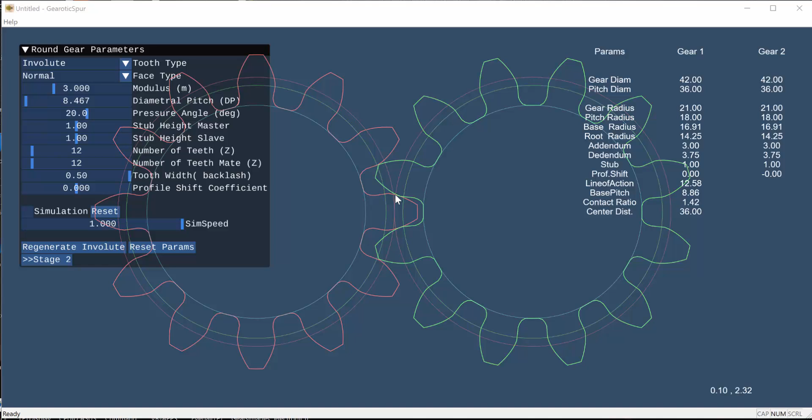Hello everyone, this is a video on how to use Gearotic Spur, which will appear on your desktop if you install the latest version of Gearotic. This was written because I got sick of trying to design shaft clamps and bearing flanges into gears that I make in CAD programs. When I print a gear, I'd like it to have a way to attach it to the shaft, and this is an easier way to do that.

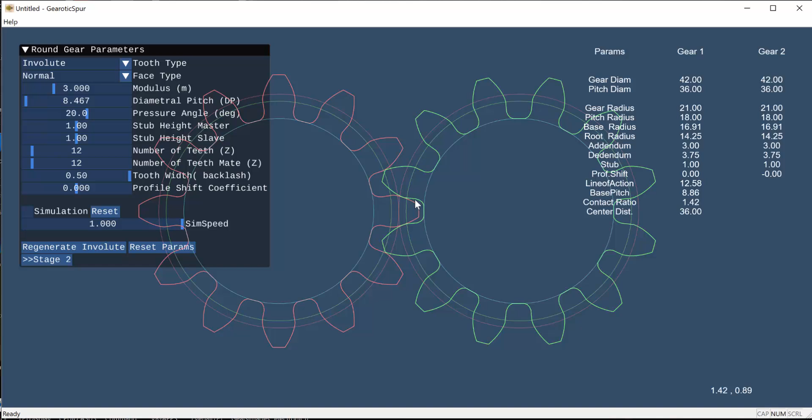This will be a quick video. If you're familiar with Gearotic, you're already familiar with almost every setting on the screen, but the way these things are displayed is a little different in this program, and there are 3 stages to designing a gear. When you start the program up, what you see on screen is stage 1, where we can simulate the gears to see how our mesh is.

The only setting I think I need to point out here is backlash settings. In some programs, you adjust the shaft distance to adjust your backlash. I don't like to do that because it creates too many complexities in designing a machine. So I like to put my backlash into the tooth width, and you will see a slider here for tooth width. I find on my 3D printer that even if I leave it at 0.5 for tooth width, they mesh very nicely on the set shaft distance. However, for many people, 3D printers will print gears a little bigger or smaller. In this case, I'd suggest you move tooth width down to about 0.48 or so, and you'll see that this leaves a gap between the gears.

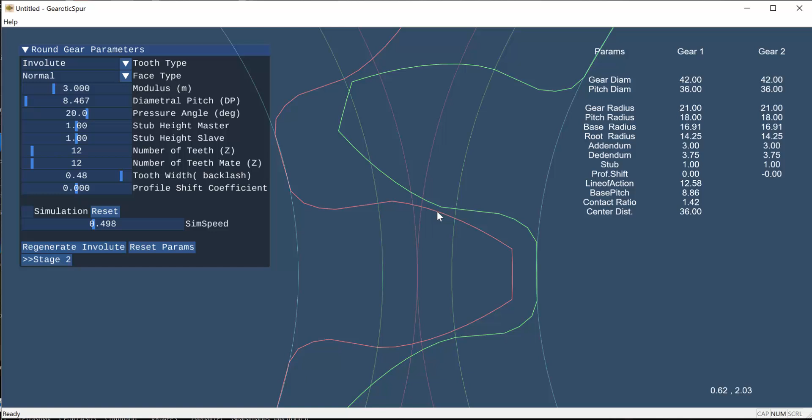Don't be fooled by what looks like a large gap in your gears. If you zoom in on one of these gears, you'll see down at the bottom right-hand corner I've got measurements in millimeters. If we look at the distance from the edge of this involute tooth to this involute tooth, you can see it's only about 1/10 or 2/10 of a millimeter. So it's not a big gap, but it does allow for a good backlash adjustment.

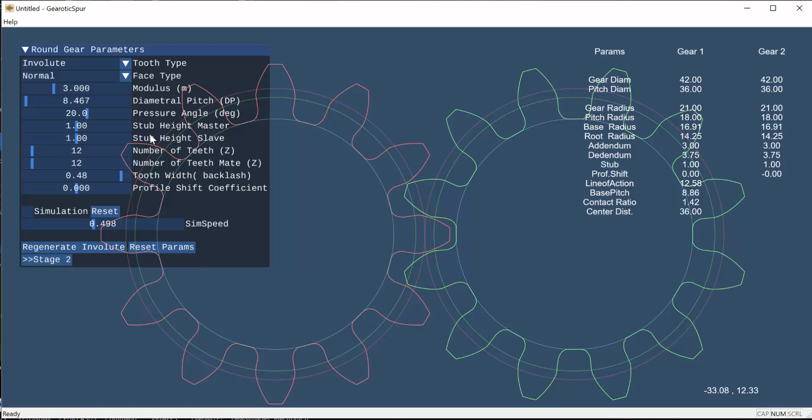Everything else here is typical to Gearotic, from the pitch and modulus to the pressure angle and so on. The only thing I should point out is that you can select normal or helical teeth, as well as involute or cycloidal tooth type. Once you do that, you'll see on the right-hand side of your screen all the statistics for the gear diameters and so on, and the center distance at the very end, in this case 36 millimeters.

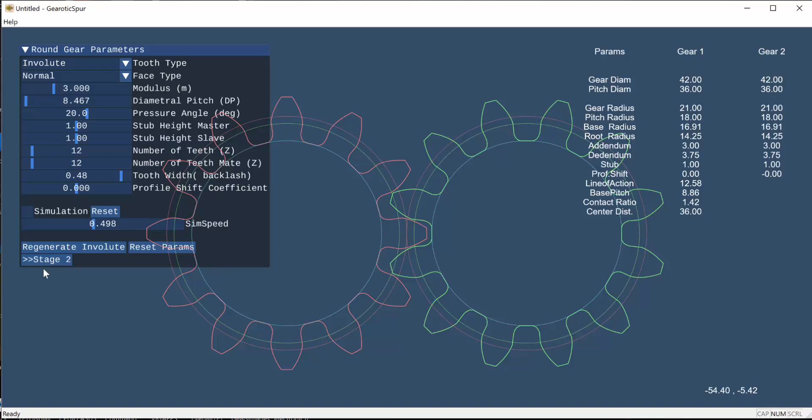When you're finished designing your gear outline, that's when we go to stage 2. Hit the stage 2 button, and you'll see it takes a second. I've got a fairly fast machine, and it takes 3 or 4 seconds to generate these outlines of spur gears.

These spur gears are generated using signed distance functions, so they're quite different from the spur gears that Gearotic actually generates. Their STLs are a much tighter manifold - it's just a better meshing system for these gears. That's not super important; even the old gears will print quite well, but for some of you, in some instances, it's better to have a nice closed manifold.

These gears can also be made quite small. If you're using a resin printer, for example, you could print a gear which is 1 or 2 millimeters across - not a problem most of us will ever have. So enough said on that.

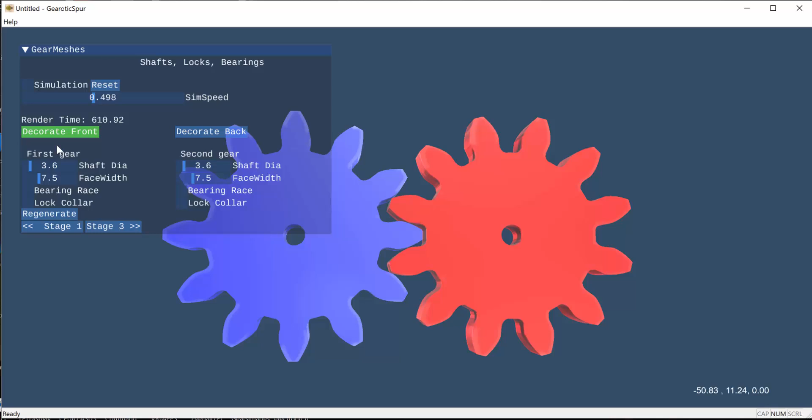On this screen, stage 2, is where we decorate our gears. When I say decoration, I mean things like bearing races and lock collars. Let's take a look, for example, at a bearing race. We have 2 gears here, a blue and a red. The blue gear is always the first part of your menu system, the red gear is always the second part. This is important to note because right now I'm on decorate front and the blue gear is on the left. If I hit decorate back, you can see the gears swap position - the first part of the menu is still for the blue gear.

That's worth taking note of. So let's turn on a bearing race as the most simple example. You can see I can set an outside diameter and a race depth. And if I hit regenerate, you can see this blue gear now has a bearing race in it.

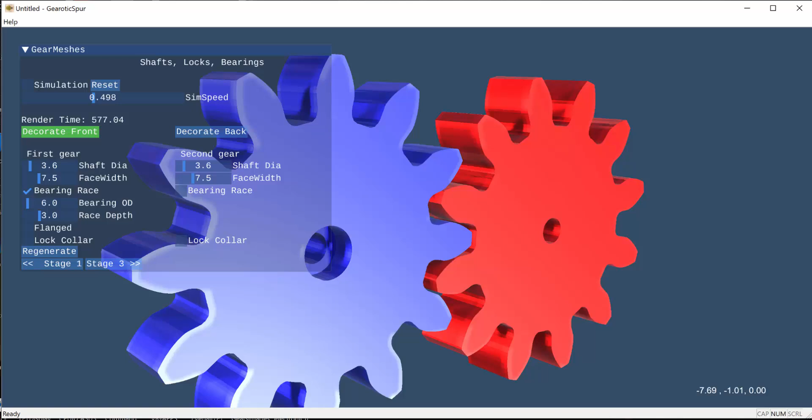You sometimes will see aberrations in there, like a shadow inside that bearing race. Don't worry about this. In order to keep regeneration times down, we're in fairly low resolution until the final stage of gear generation. So here we've pressed in a hole for a bearing of 6 millimeter OD, 3 millimeters deep. Pretty simple to figure that one out.

We can add a flange to that in case you have a flanged bearing. I sometimes like to put flanged bearings onto my system just because I have a lot of them laying around. And if we regenerate, we can see that gear now has a flange.

One thing about the menu system, you'll notice I can roll it around, but if I point my mouse inside this menu, nothing will happen. The menu overrides the screen's ability to rotate, so keep in mind that by hitting this arrow up on the top, you can shrink that away and inspect either one of the gears. So again, there's our bearing race and flange.

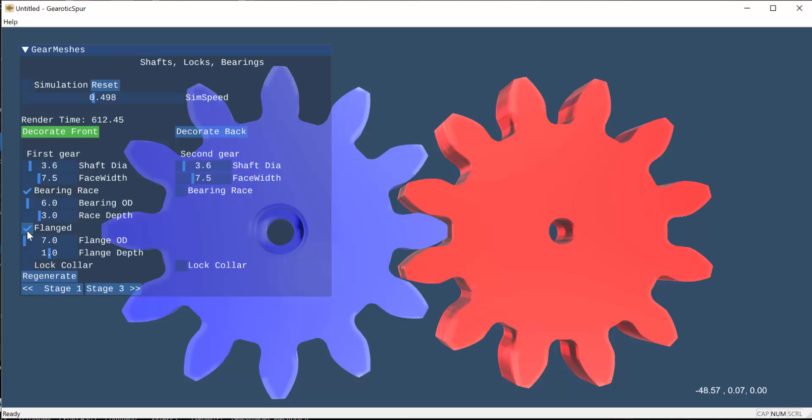Quite often the problem when you put a gear on a shaft is you need something to lock it in place rather than something to give it a bearing. So I'm going to turn off the bearing and flange, and we'll go to a lock collar. Let's put the lock collar on the red gear so we can see it a bit easier, and we'll hit regenerate.

So there is a lock collar, and you can see it's got a hole in it for a grub screw. The grub screw hole is right here. You can set the diameter of it, and for a lot of us, that's enough. A grub screw will screw into a PLA gear with a fair amount of friction. It may be enough for you.

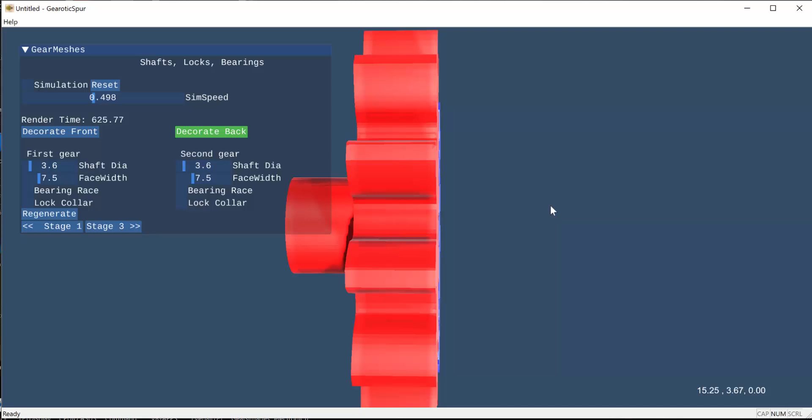If it's not, and you still want to use a grub screw, we can go back and then put a lock collar on the back of the gear as well. And if we regenerate, now that gear has two locking collars, and you can put two grub screws in it and you'll get a bit more clamp.

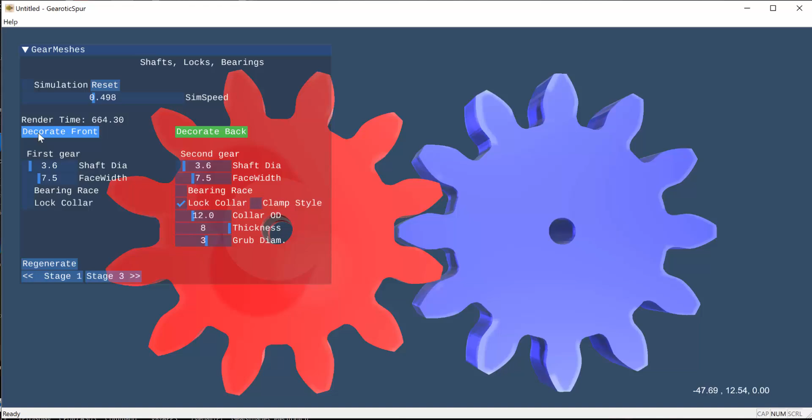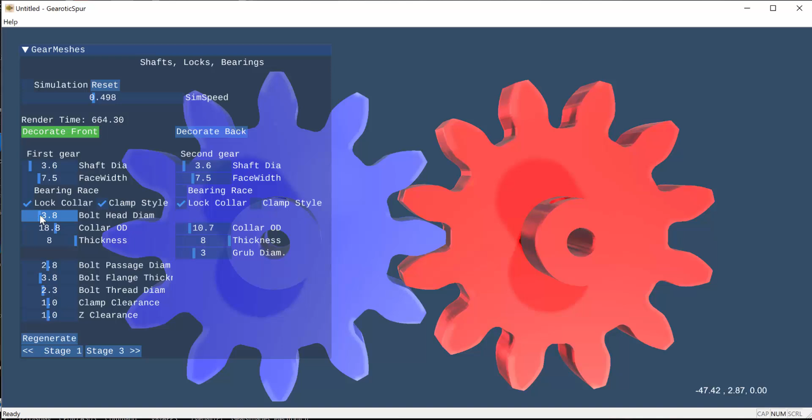This is not good enough for some types of gears. It's just not enough pressure. You may want a more complex clamp, and that you will get if you click clamp style. Once we go to clamp style, I recommend that you first set your bolt head diameter. You can see that the other settings change automatically when I select a bolt size. It gives you average measurements, which will kind of ensure that you get a good result, but you're going to have to float around with these a bit to match your situation. So I'm going to say that we're going to have a 4mm screw in this, for example, the bolt head itself, and I'm just going to regenerate without changing anything else.

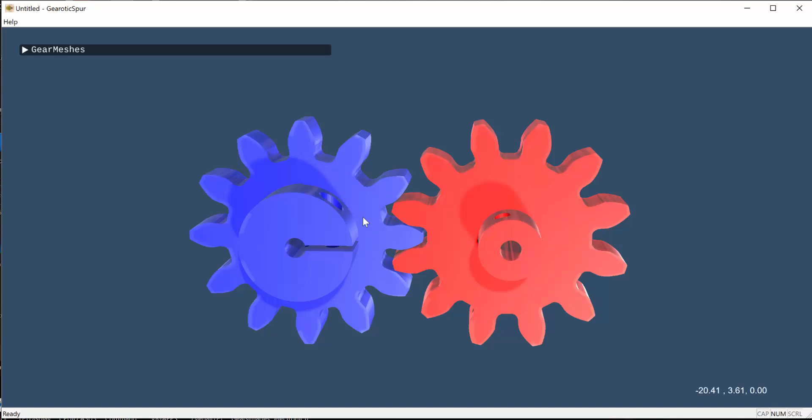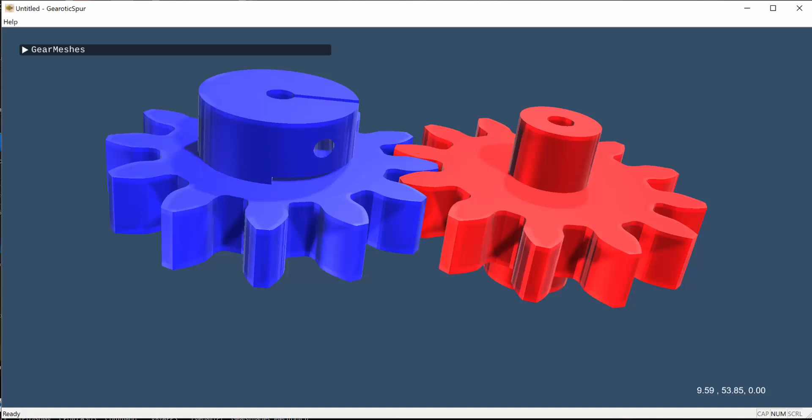You can see the system has decided to give us a collar using most of the gear. These are small gears, by the way, so you wouldn't have much room for spokes and so on in these gears anyway. But here's your clamp collar. We have a hole that the bolt will go into, and you can see there is a ledge here where the head of the bolt will bottom out. The shaft of the bolt will then go through this second release hole, and the third hole is for threading the bolt into. Double-clicking your mouse will always take you back to normal, by the way. So that is a clamp style.

Since we're split right down the middle here, it doesn't take much power on this thread to actually clamp down with a great amount of force on a gear. And again, you can put one on the other side if you really want to get some strong clamping strength out of that.

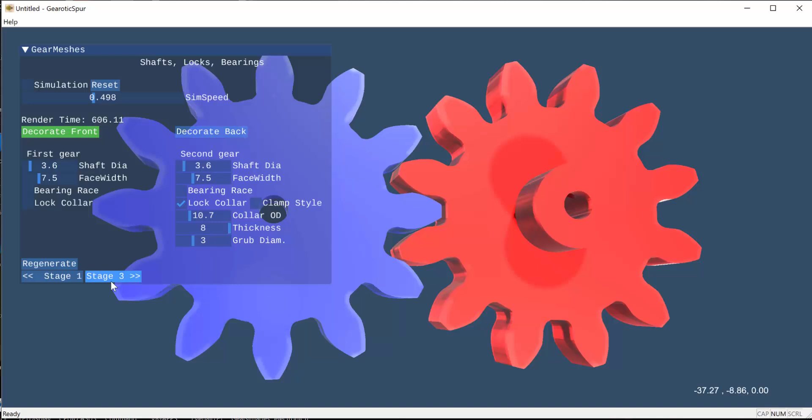I'm going to turn off that clamp style just for the sake of speed here, because I want to get through this video fairly quickly, and it's easier to show you the next stage if we don't have a bunch of clamps in the way. So I'm going to go now to stage 3.

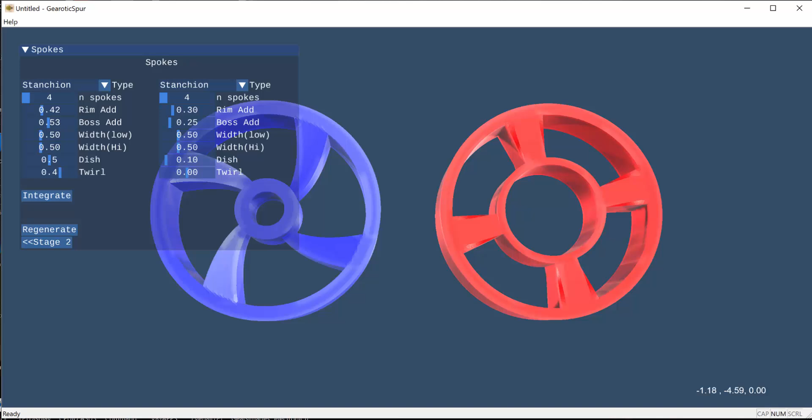Now you'll notice the second gear has a larger hole in the middle, and this is because I left the clamp collar on that gear, so you can see there's less area for the spokes.

In addition to stanchion spokes, we have just circular spokes. We can increase the number of spokes, dish the spokes, so now you can see they're kind of dished in a bit. We can twirl the spokes just to get a design.

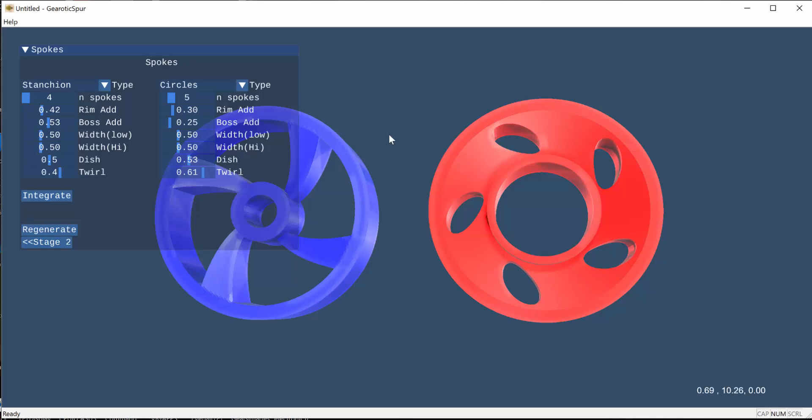And when you're finished and you've set a number of spokes and you're happy with the rims and so on, that is when we would hit the integrate button. This will add the teeth to your gear and will also create a high resolution output.

So any artifacts should be gone at this stage. And there's our completed gears. As you can see, the spokes have been added in.

You may still see a couple aberrations. That's the nature of doing something as complex as a gear with a signed distance function. But I printed many of these and I found none of them to be a problem at this point.

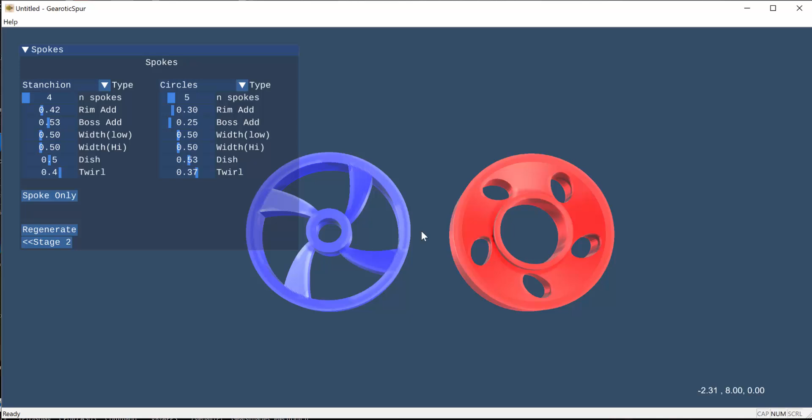Then hit integrate, bring back our gears again, and you can see it takes several seconds for everything to get integrated. And when that happens, you can see two buttons appear: export left side and export right side.

This will allow you to put out your gears to your desktop or to any folder you wish for 3D printing. And that's it. That's all you can do with the program.

Every time you run it, it starts off as a fresh run. It will not remember your settings at this point. This is a beta just to give you quick access to these types of gears.

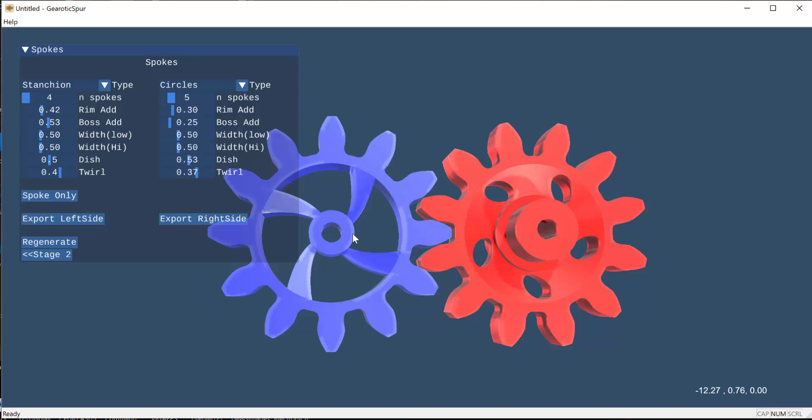One last thing I'll show you is the quality of the mesh of these gears. For those of you who are into meshing, I thought I'd take a quick second to show you the quality of the meshes that are produced by Spur.

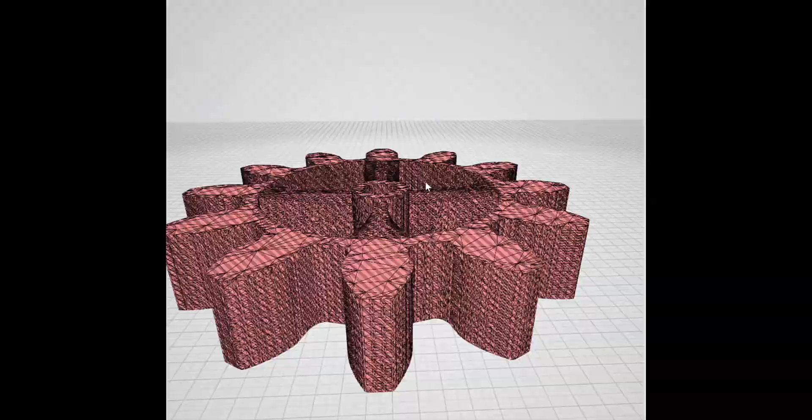You can see that the tessellations here are much finer than what Gearotic puts out. Again, it won't make a difference to most of you for your 3D printing, but these manifolds are much tighter and follow contours much better than the previous STLs.

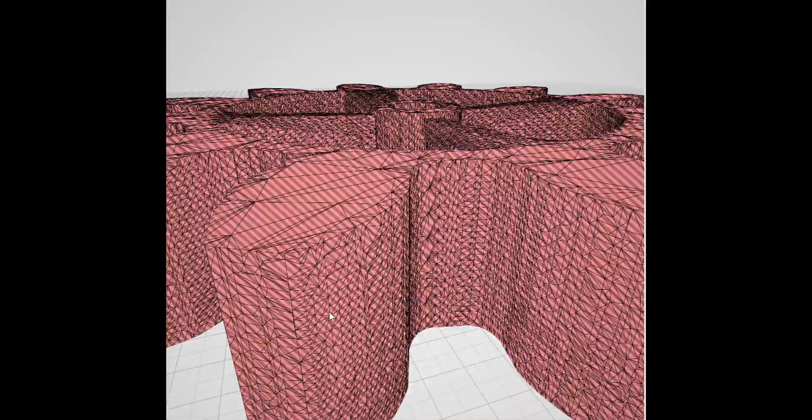There are algorithms involved in signed distance function which allow us to reduce the size of the least significant aspects of the involutes so that they don't take up quite as much room. A gear will always be a substantial STL most of the time because you want the accuracy of the involute curves, and Gearotic Spur tries to do that as best it can.

That's all that you need to see on the quality of the STLs. I just thought it was worth pointing out in this case.